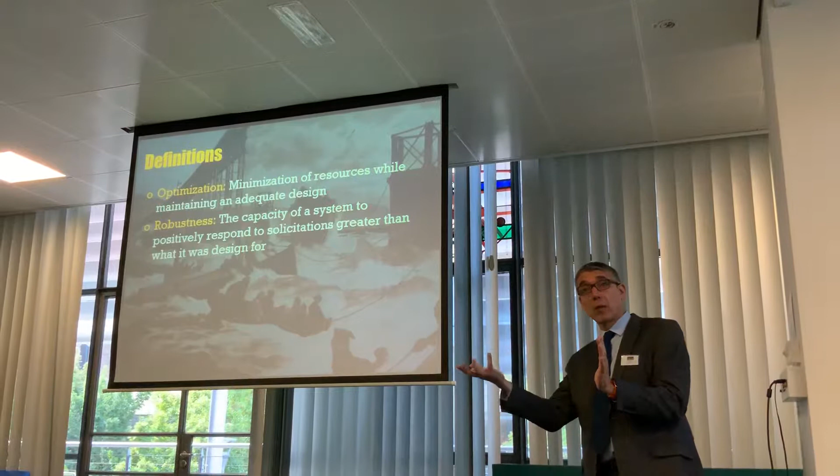Robustness is the capacity of a system to positively respond to solicitations greater than what it was designed for. In other words, I design for a certain set of parameters, but sometimes those parameters get exceeded. The concept of robustness is how well can I cope with solicitations that exceed the design parameters.

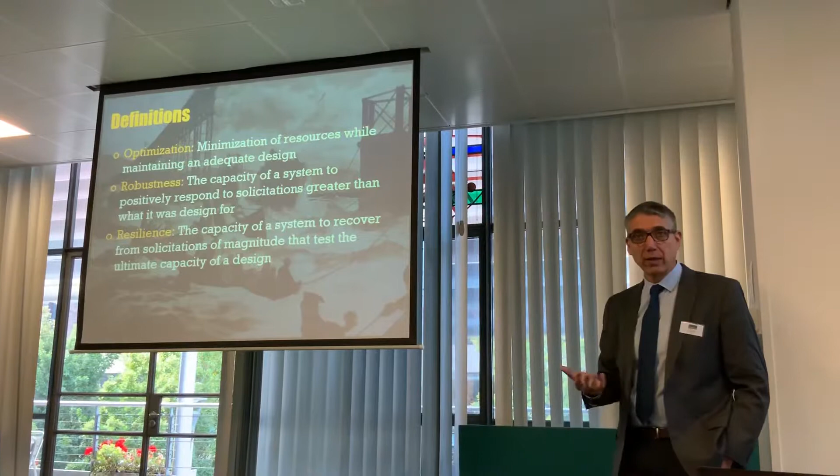When it comes to resilience, it's the capacity of the system to recover. So effectively, we are pushing the bounds to the point where we are inducing certain forms of failure, and we need to be able to understand how rapidly we can recover. A resilient system is a system that recovers very rapidly. A non-resilient system is a system that takes a long time to recover.

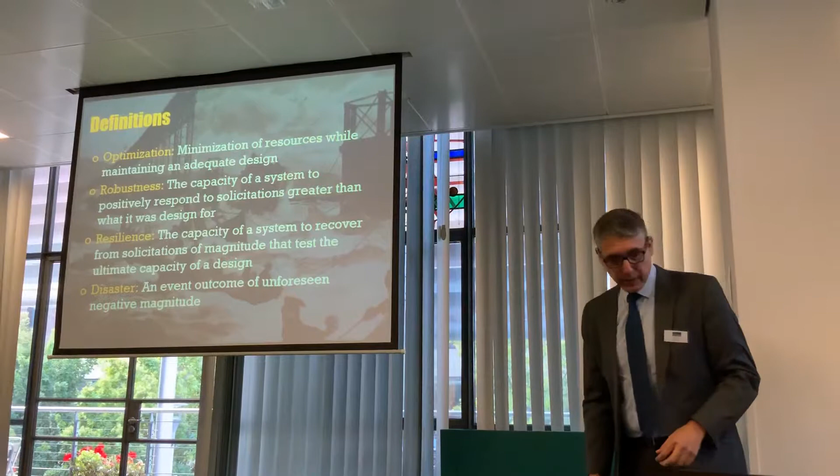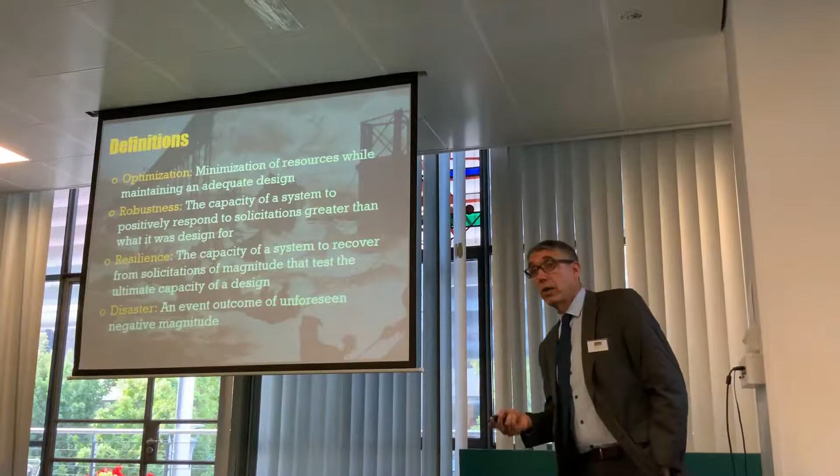So finally, a disaster is an event or an outcome of an unforeseen negative magnitude. I'm going to be using this terminology, but I'm going to define it in those terms. I know there's many other definitions, and people will argue many different approaches to those terms, but I'm going to be using them in those terms. So a disaster is a case that we didn't plan for. In other words, we expected a certain response, and we got something that was much worse than that.

The alternative to all that, when we stop talking about optimization, we stop talking about robustness or resilience, because there's no point.

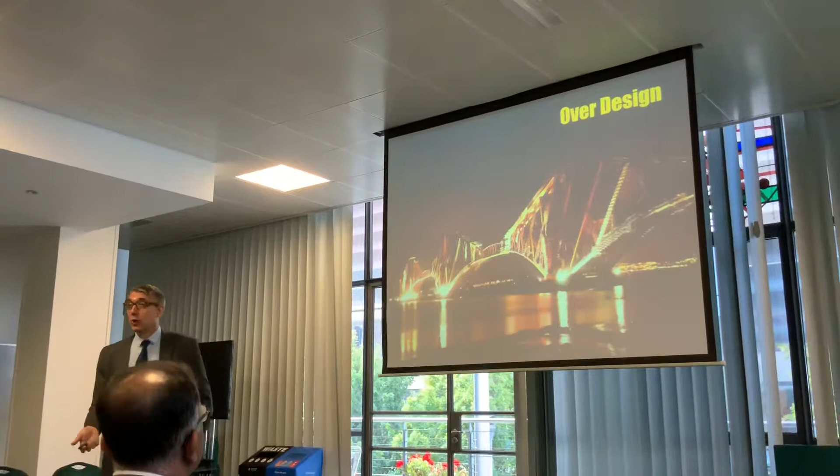It's a case where I completely over-dimension. As I'm sure you're all familiar with that photograph, this was the response to the Tay Bridge disaster - that's the Forth Rail Bridge. You can see that this system was not only very nicely designed, but also there was an element of over-design embedded into the system.

In those cases, basically none of these things mean anything, because effectively I'm just completely over-dimensioning, and I'm over-dimensioning to try to avoid a problem that I can not actually understand. So it is clearly not a matter of optimization, resilience, or robustness, and I'm trying to simply prevent the disaster. So, what is optimized design?

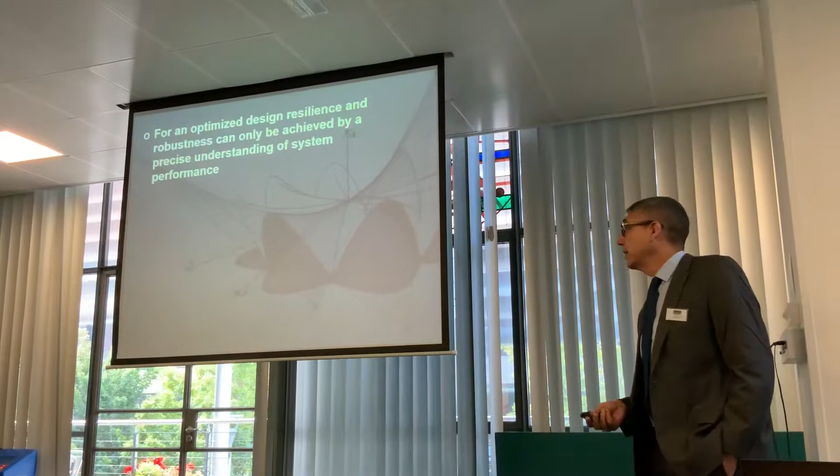When we're talking about optimized design, we need to take into account all 3 aspects of it. Many people have seen diagrams like this, like Candela's diagram of these very thin concrete shells. In that case, basically, it is a truly optimized design for structural purposes.

For an optimized design, resilience and robustness can only be achieved by precise understanding of the system performance. If you don't understand the mathematics of the structural system, in this particular case, you will never be able to actually design a thin shell that works the way Candela designed that thin shell to work. We need to have a true understanding of the performance of the system to be able to achieve the objective.

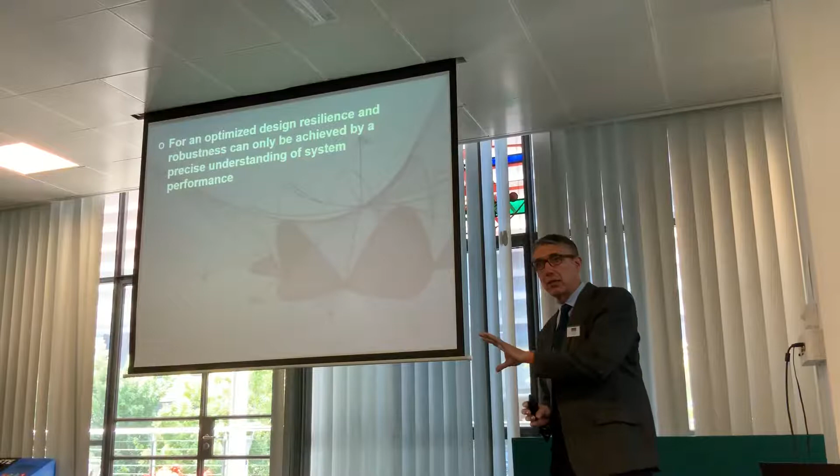At the core to me is that if you can actually explicitly quantify performance, then you can do optimization, you can analyze robustness, and you can analyze resilience. And the question is, can we actually do that for fire?

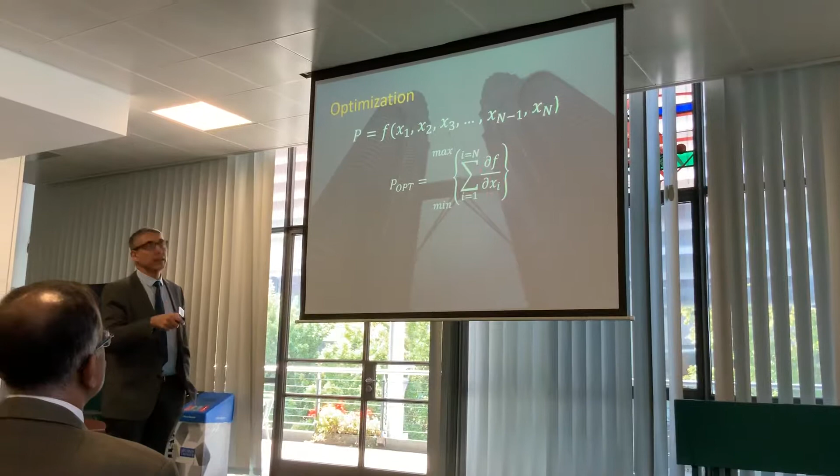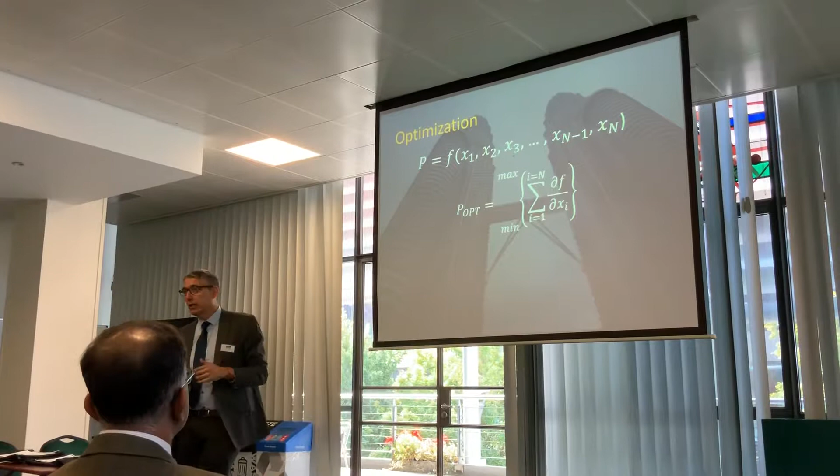When we're looking into optimization, we are not today doing that in the case of fire. What we do in the case of optimization is basically take a function, and that function has a set of variables, n different variables, and it gives me a performance metric. If I'm going to optimize, I'm going to create some sort of summation of the derivatives of all those functions, and I'm going to either maximize or minimize that sum. I put all my variables, I look at all the derivatives, and when the derivative approaches 0, then I'm reaching either a maximum or a minimum.

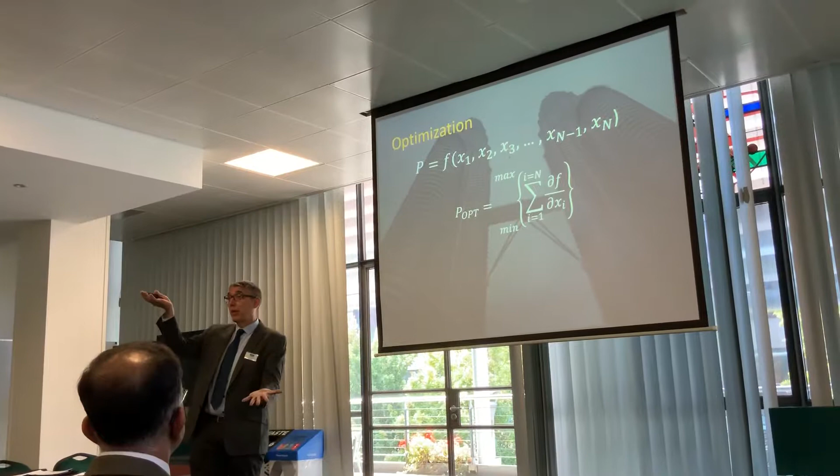I fix all that through some sort of algorithm that allows me to pile up different variables into that function. But the key to this is that the sum I'm working on is from i equals 1 to i equals n. In other words, to be able to optimize the system, I need to be able to optimize simultaneously all the variables, because all the variables represent trade-offs. So effectively, if I'm bringing one up, the other one has to come down in such a way that at the end I arrive at the optimal function that I need to work with.

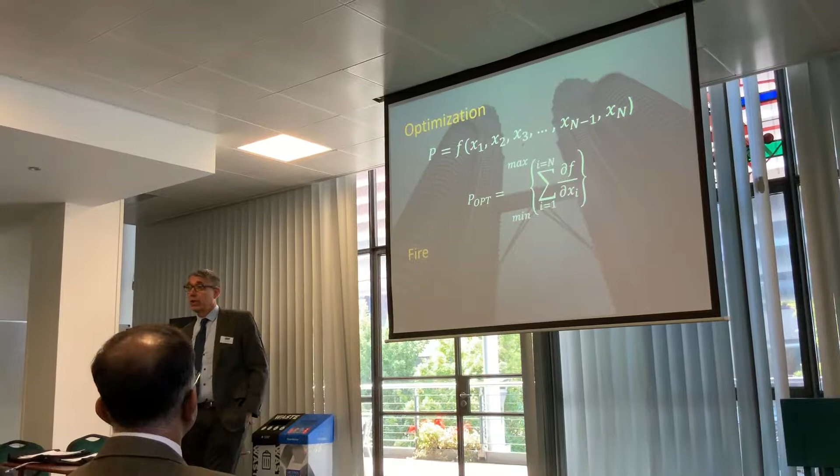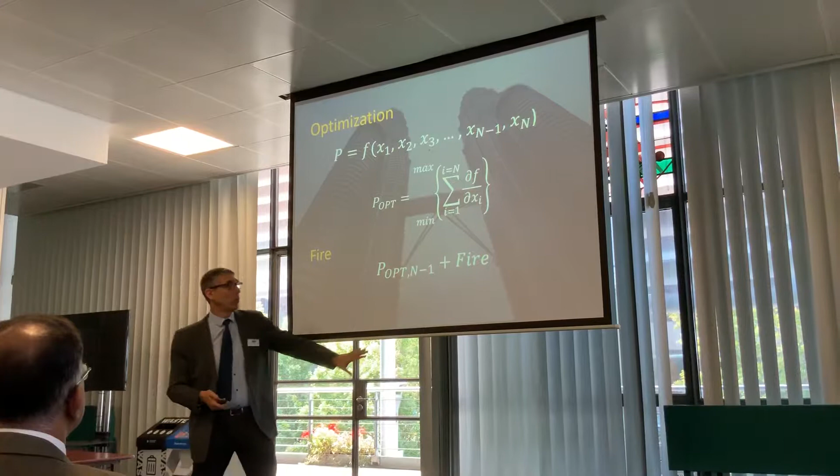The problem is that in regards to fire, what we're doing is effectively optimizing for n minus 1. Once we optimize for n minus 1, and then we slap on the fire, the outcome is never the optimal. In other words, this is a mistake. We cannot optimize in those terms, because effectively you are optimizing all the variables, and then adding on the fire as the final variable of the problem. And that is very problematic.

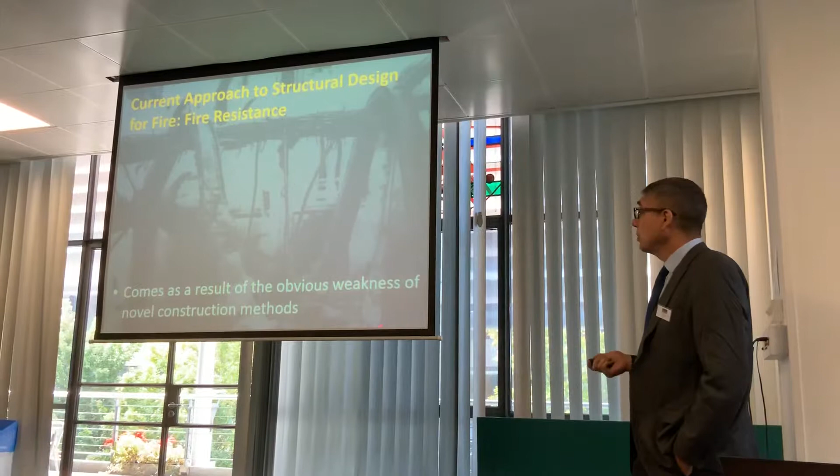Now you can see that in the current approach - because obviously the current approach is that of fire resistance - it was a very old process that came as a result of the obvious weaknesses of novel construction methods. As you can see here, the steel beams hanging on top of the timber beam. So we had a very simple problem that we needed to solve, and we tried to fix it by creating the concept of fire resistance.

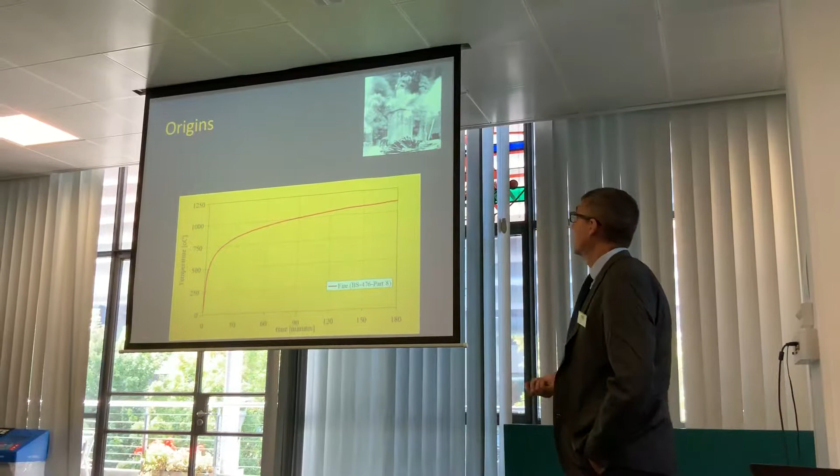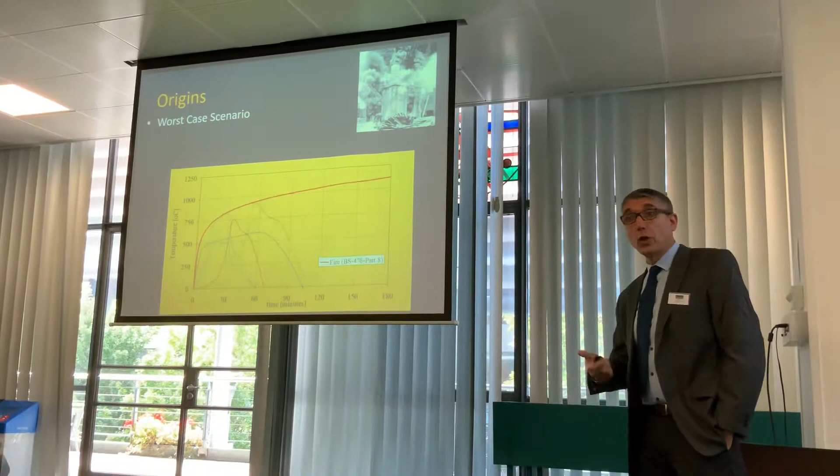That concept of fire resistance led to this particular curve, and that curve was devised with tests that looked like this - this is the 1920s, and this is what we were doing. We were trying to achieve a worst case scenario, not an optimal condition or understanding of the problem, just a worst case scenario. Basically we created an envelope to that worst case scenario, and then we created a failure criteria related to total fuel consumption that gave me the required fire ratings.

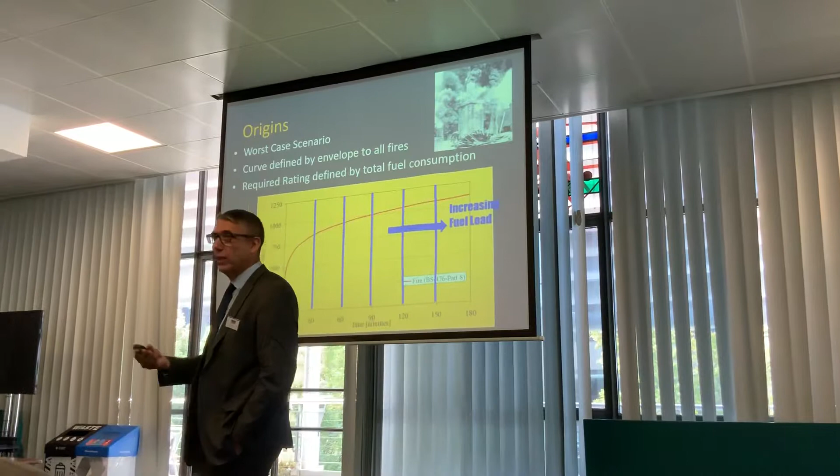That doesn't mean that I understood the problem. That doesn't mean I understood structural behavior. All that means is I created an artificial scenario that made me comfortable that I was on the conservative side.

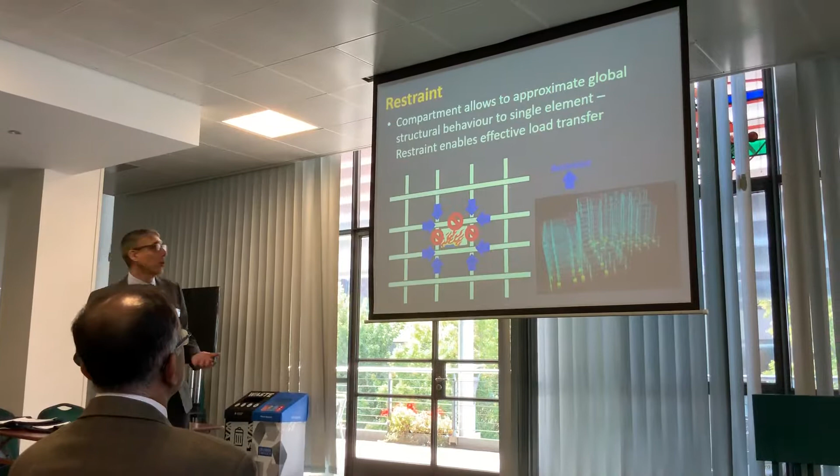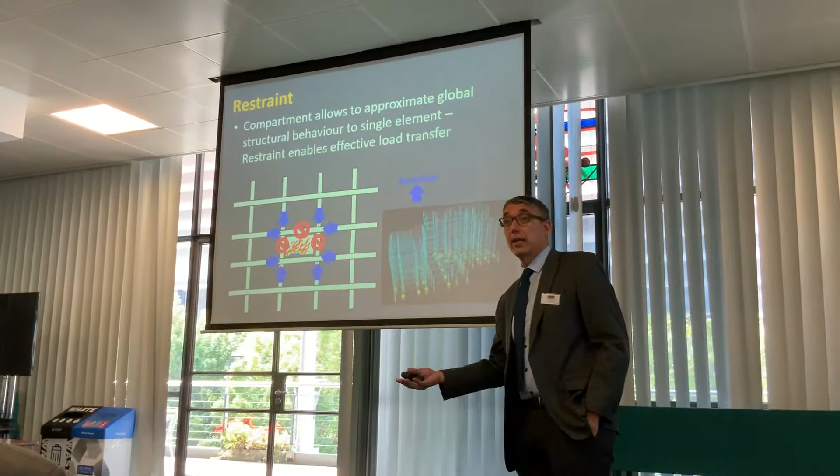There were a lot of arguments made about restraint in such a way that you could test a single element and then project that to global behavior. God knows if that could have ever worked. The problem is we've carried those arguments, enabling us to work with single element testing and extrapolating that to full structural behavior.

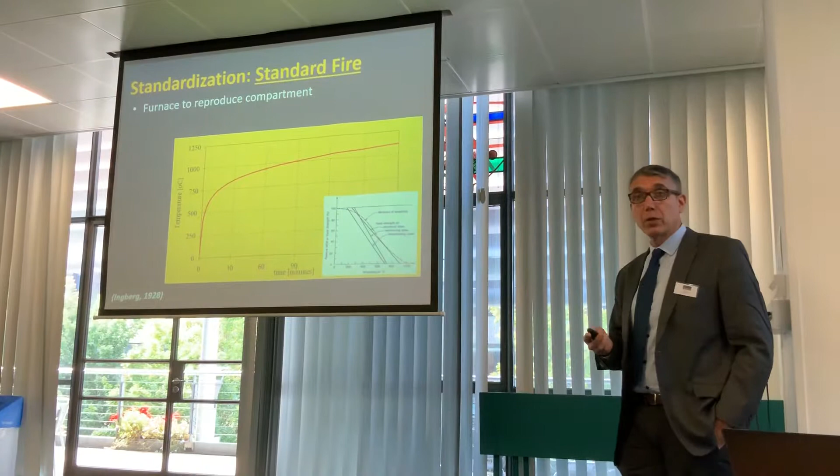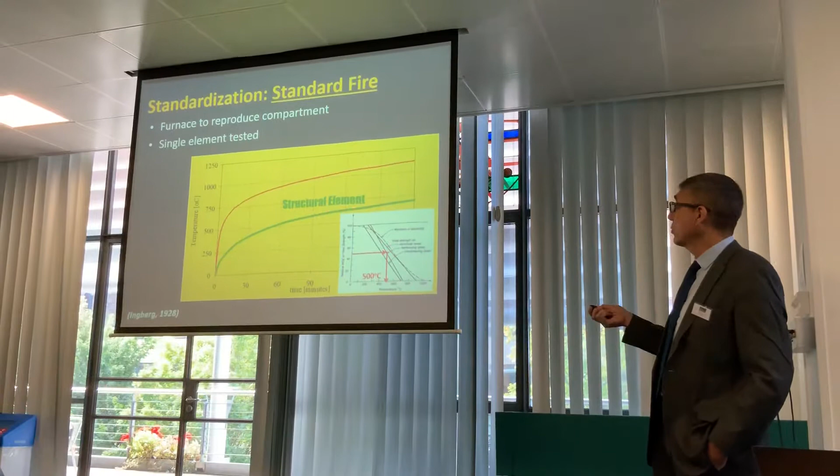So we did all that, then we created the standard fire, we created a test, the furnace reproduced that particular worst case scenario, and we rely on a very simplistic failure criteria, for example in the case of steel, arriving to a certain percentage of its mechanical properties. So we determine after we lose a certain percentage, then all of a sudden we can say, if I'm heating the structural element and I can find that critical temperature, I can get my fire resistance. So what's physical about this?

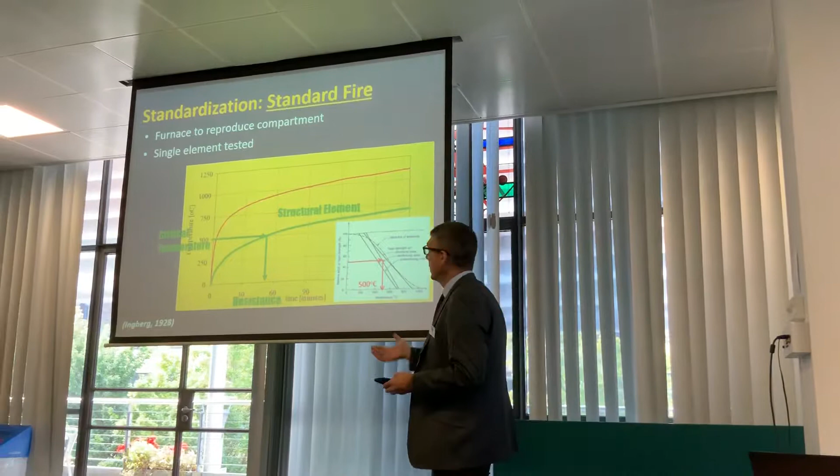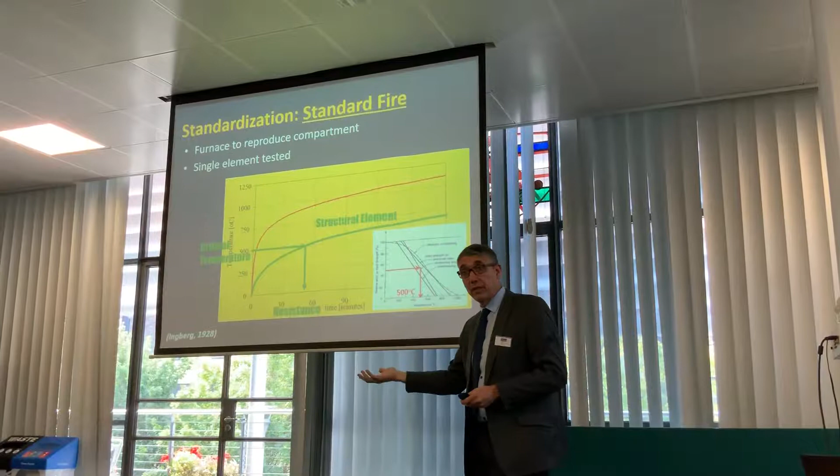Physical about this is not the fire. The fire is a mathematical envelope to an event that is actually a compilation of events, so it's just an envelope. The requirement of fire resistance is based on total fuel consumption. Now total fuel consumption in many ways depends on so many variables that whatever way it was defined, it was probably not necessarily a physically based definition, it was just purely an arbitrary test. The failure criteria utilizes one physical parameter, but it ignores many other parameters like thermal expansion, for example.

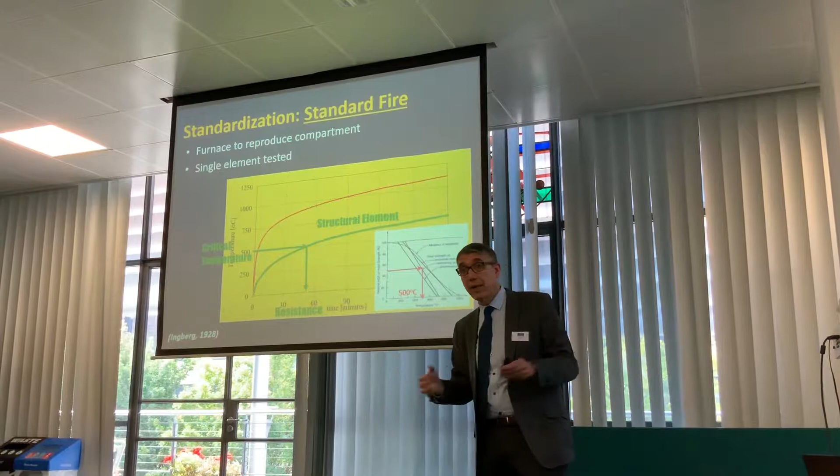And then all of a sudden we've eliminated all the physics of the structural behavior. So effectively this is not a physical problem. It is just purely a concoction that we have created to try to describe in a conservative way a form of behavior that we want to avoid. That's really all it is.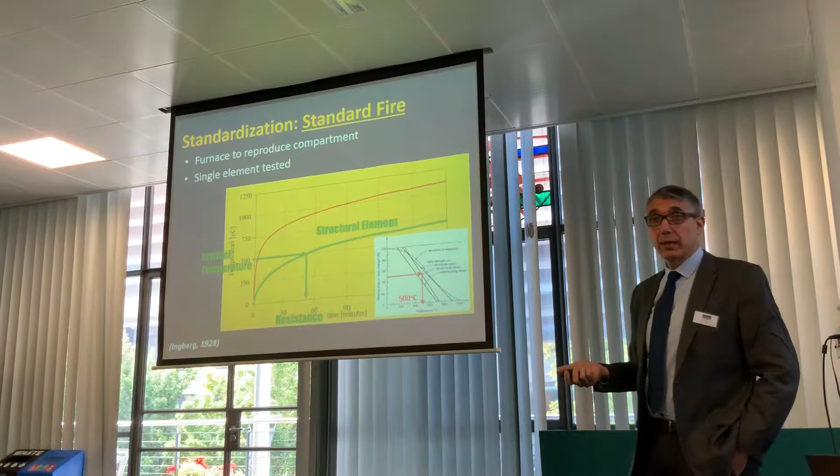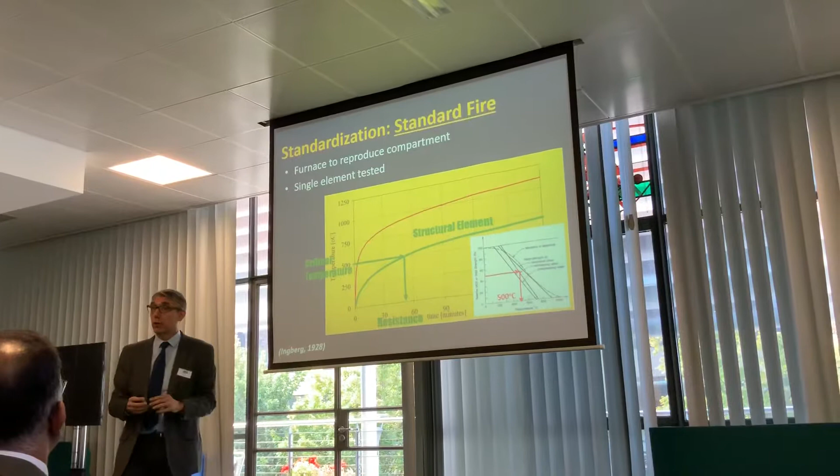Now, can this allow me to do optimization? Not at all, because the problem is that effectively I don't know what problem I'm modeling here. All I am doing is creating a concoction that then I can put into regulation that effectively eliminates 99% of the physics of the problem. So all these concepts of optimization, resilience, and robustness clearly cannot be used in the context of fire resistance.

It is not possible. It's the optimization of n-1 variables plus fire, and it is adding fire in a completely non-physical way. So the first step is to accept that the way in which we do it has nothing to do with this terminology. This has absolutely nothing to do with optimizing with resilience or with robustness. It is purely a regulatory concoction that effectively allows us to design under an umbrella of comfort that we are within the conservative bounds.

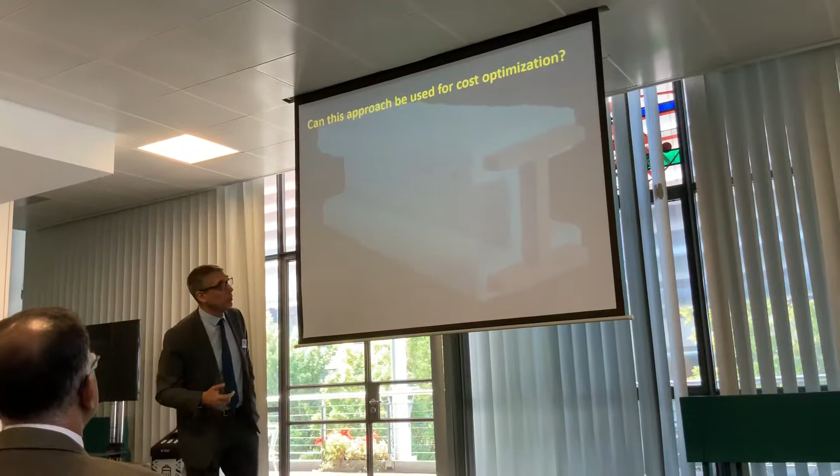So, very, very simple. This is something that a former student of mine, Allan Jowsey, presents quite regularly, which is the most simplistic form of optimization: money.

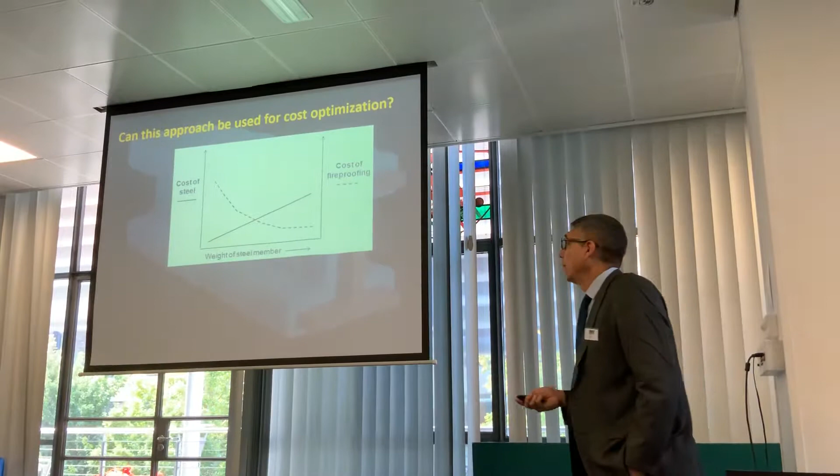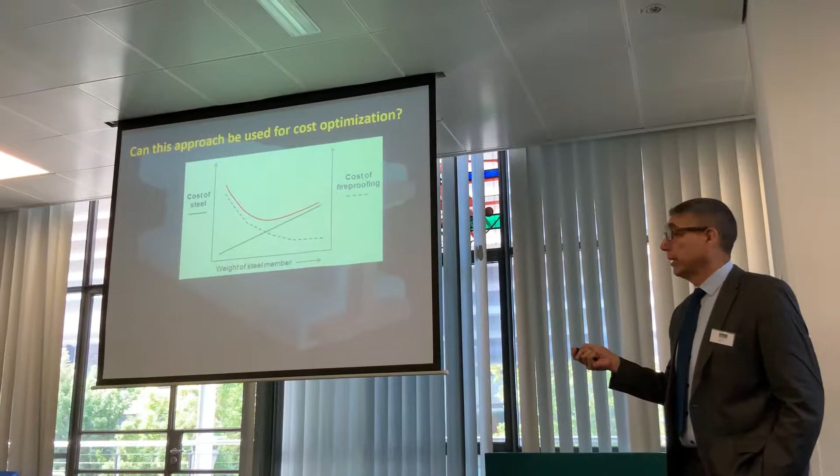So if you take the cost of steel, it increases linearly with weight. If you take the cost of fireproofing, it decreases as the steel member becomes bigger. So effectively the cost of steel plus fireproofing is the summation of those two curves, and you get that curve. Optimization means that you are here — that is the minimum cost that you have for the system.

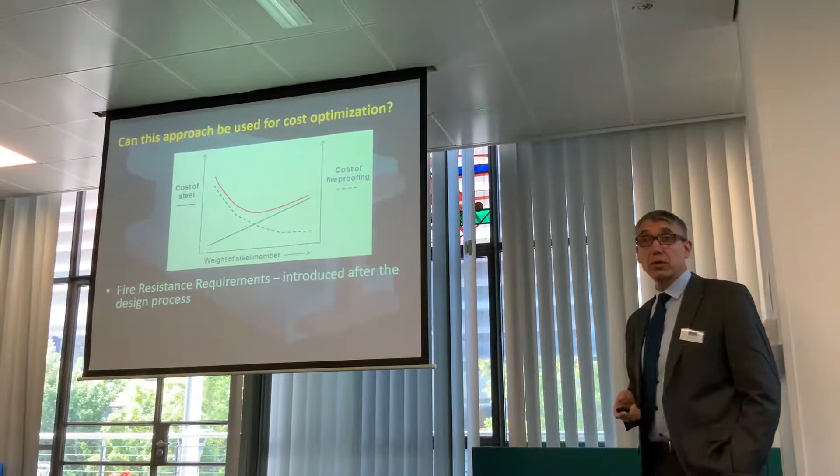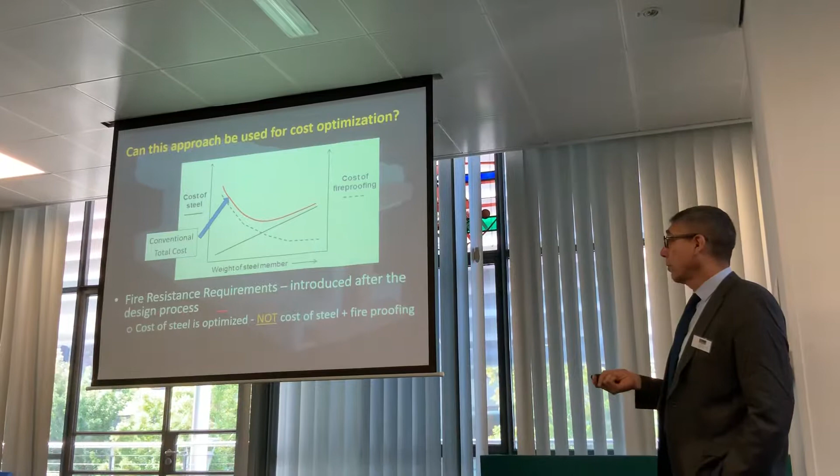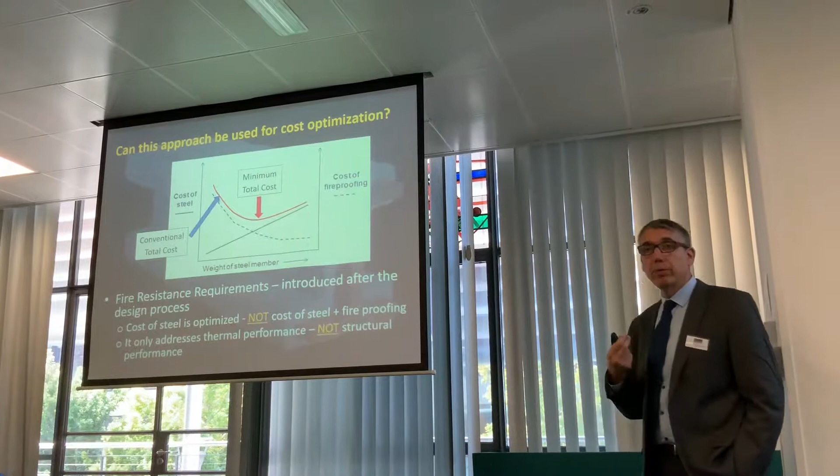So when you have fire resistance requirements, you're going to introduce them after the design process. The structural engineer is going to try to optimize for the minimum amount of steel, so they're going to go as far as possible in here, and then they're going to slap the fireproofing on and end up here. In reality, if the two things were done together, you would not be in a situation where the system is unoptimized, but you would actually be attaining the minimum cost. It's as simple as that. Even in the most simplistic of analysis, you realize the process we're following is not leading to optimization.

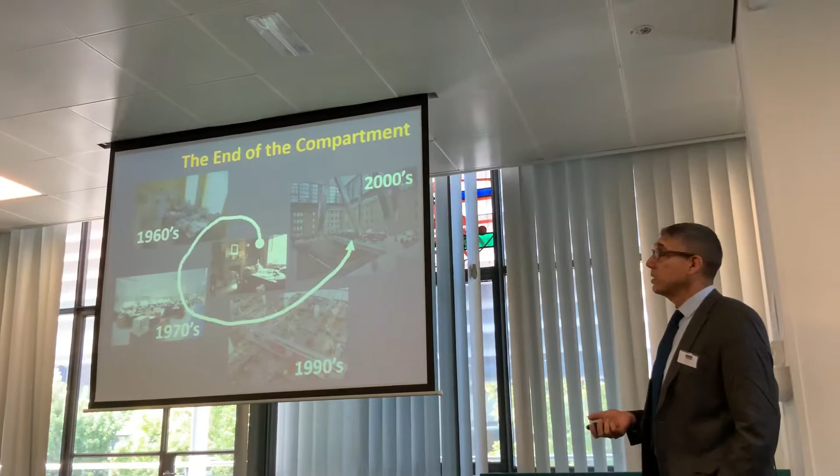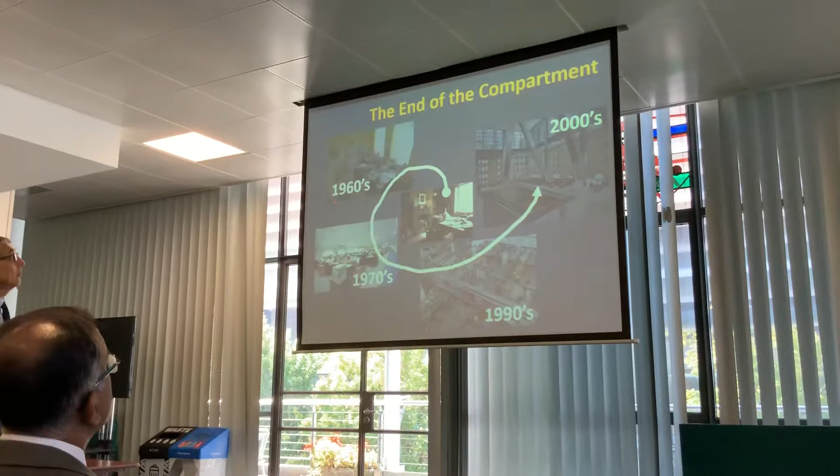So in a similar manner, we have the fire resistance framework that depends on the existence of a compartment. The whole worst case scenario was defined about that. Now, if you look at this, maybe this was valid all the way till some time in the 1960s, but clearly beyond that, the whole concept of the compartment is gone. So the physics now doesn't even resemble reality. So can I actually talk about robustness, resilience, or optimization, where now I have a problem that has nothing to do with the problem I originally set myself up to solve?

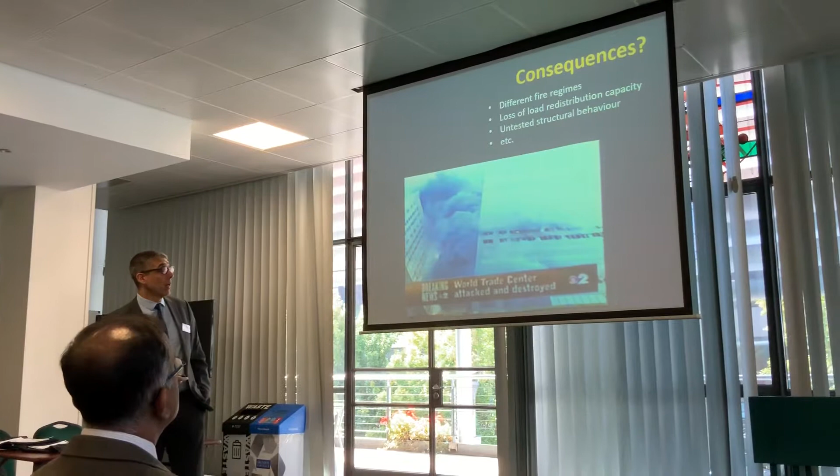The consequences: you have different fire regimes, you have loss of load redistribution capacity when you have, for example, a traveling fire that is moving around. You have untested structural behavior, all sorts of different things that appear at that point. Now, World Trade Center 7 is a perfect example of that, and it shows that you can have a fire that has absolutely nothing to do with the existing framework.

So how do we do true optimization? Basically, we need to establish structural performance. We know how to do that. You've all been working for ages in this matter, and there's a lot of work that has been done, and structures have been understood to a great extent. Nevertheless, we seem to believe that somehow the problem has only one side.

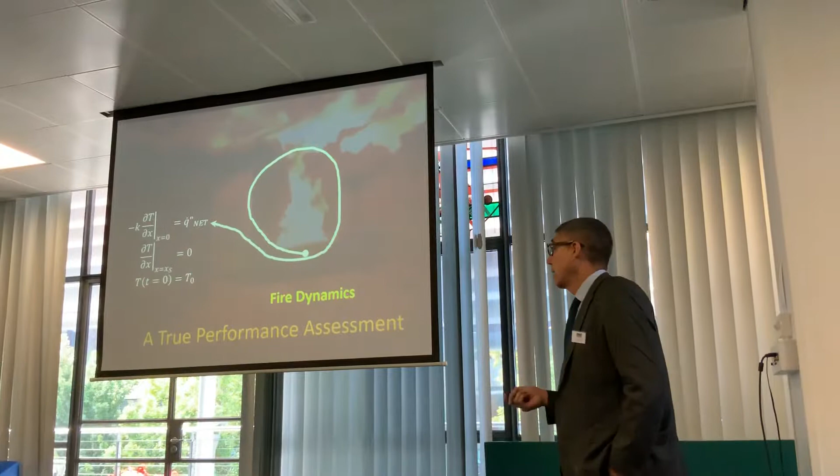So if I look at true performance assessment, the first thing that I need to do is to be able to understand the fire dynamics. That fire dynamics is going to give me a heat flux to the structure. That heat flux is going to be embedded into a heat transfer model, and that is going to lead to a structural analysis. Right now, all this is a fire resistance test, okay? But it's not the reality of a compartment.

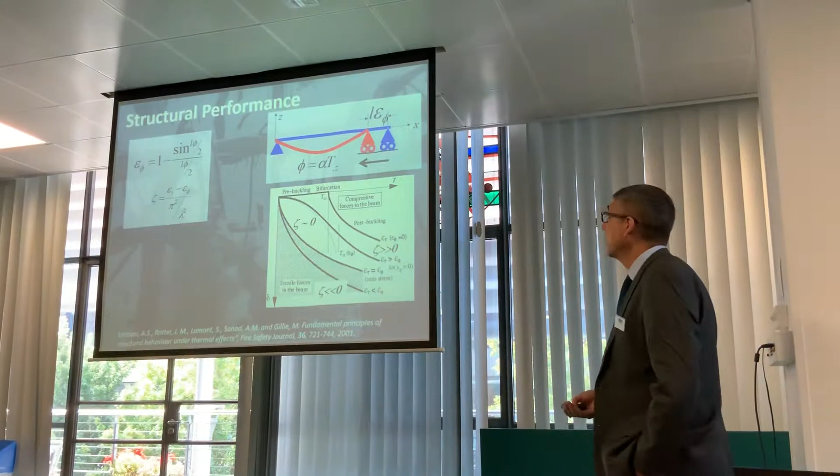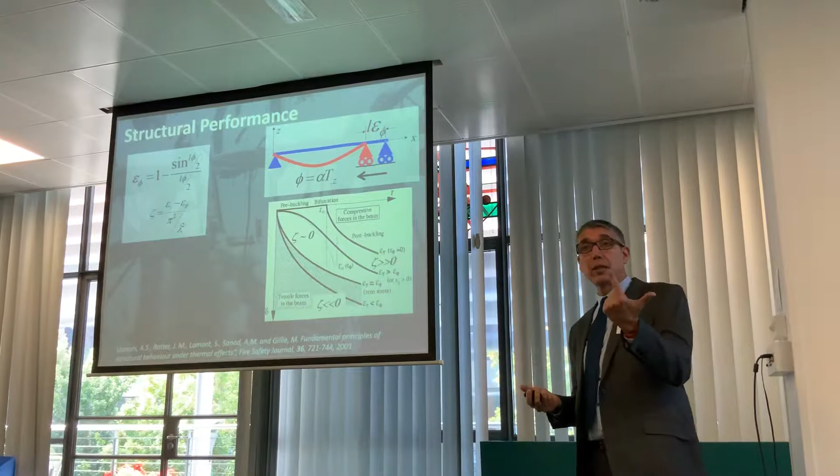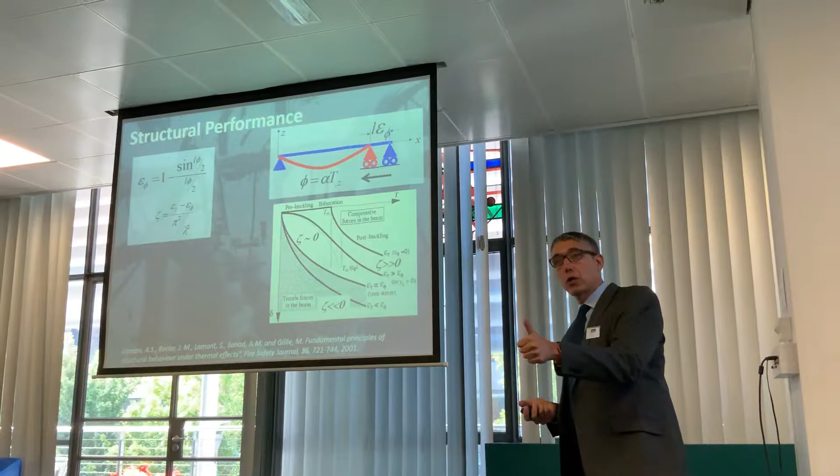So, nevertheless, when Asif developed this many years ago, he put a very simple expression that effectively defined the displacements as a function of fundamentally two parameters, the temperature and the temperature gradient. So without the temperature gradient, you don't get the value of phi, and you cannot get the behavior of the structure. So it's not only about the energy that you're putting in the structure, but it's about the rate at which you put it in. So if you don't have the temperature gradient, then you don't have structural behavior.

Now, it's very, very simple. So it's essential to be able to have the temperature gradients. Now, the temperature gradients depend on the net heat flux, and therefore depend on the fire. Does the furnace deliver the temperature gradients that I need?

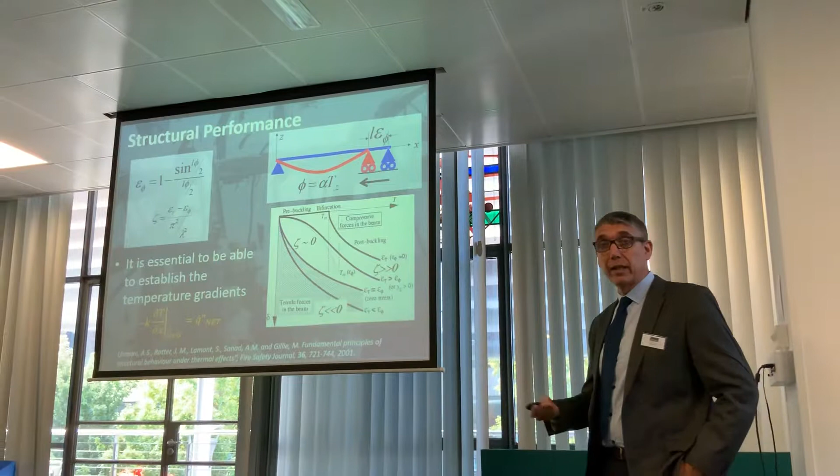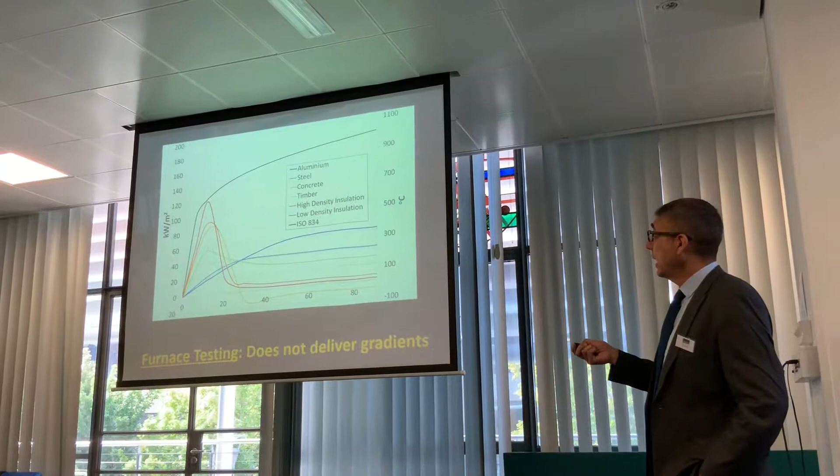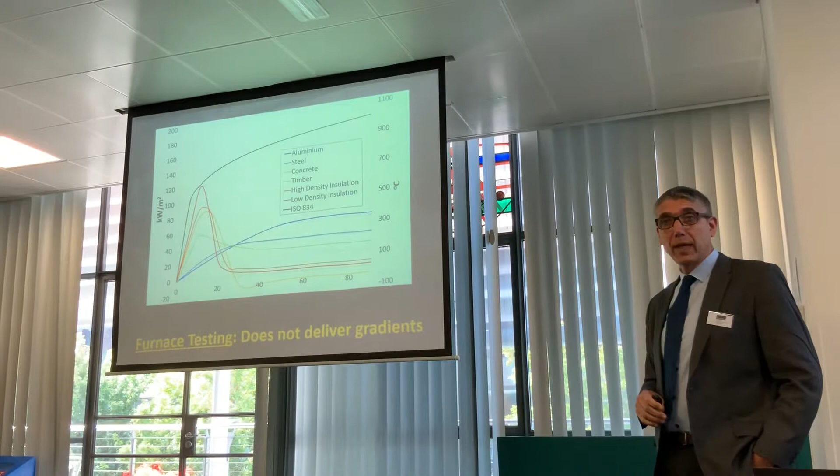Well, clearly not, because if you look at furnace testing, and I change different materials, here is the temperature versus time curve of the furnace, and every material corresponds to that particular evolution of temperature as a function of time. And as you can see, depending on what I'm testing, I get a different temperature gradient. And if I'm testing timber, I get negative temperature gradients because the timber is delivering heat to the furnace and not the furnace delivering heat to the timber. So effectively, what we're doing has nothing to do with reality.

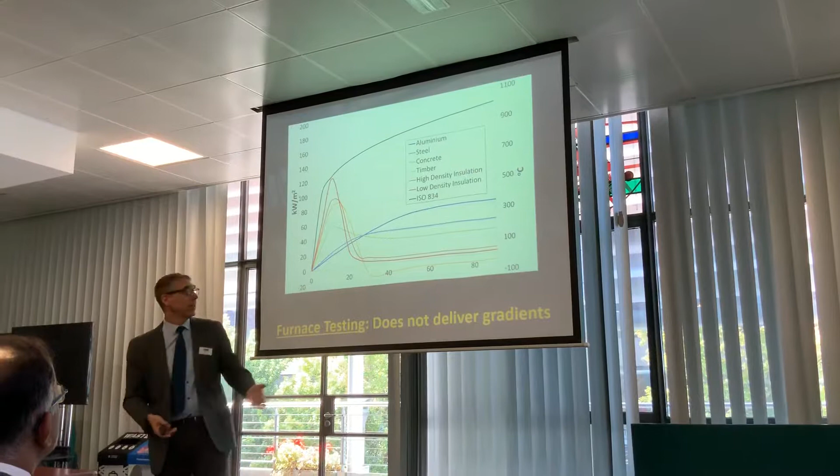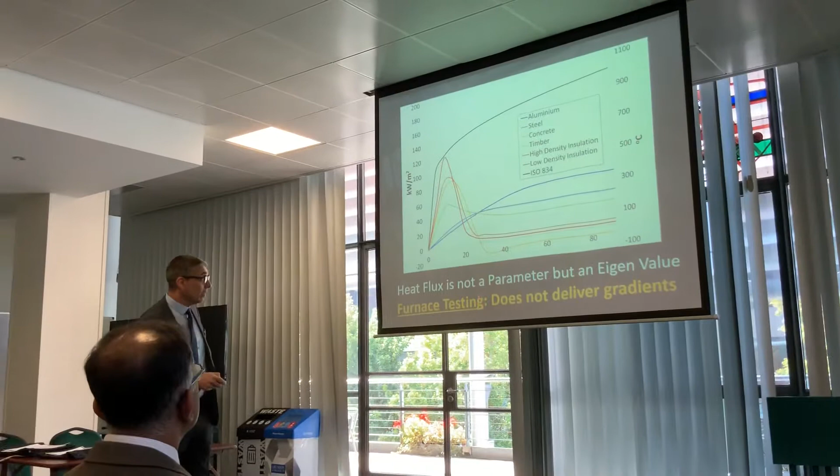And while structurally we have identified that the temperature gradient is an absolutely critical parameter, we rely on a testing procedure that delivers different temperature gradients for different materials that you're testing. So in principle, you can see where the problems go. But nevertheless, despite the fact that we know that the heat flux is the eigenvalue that I need to solve, I still stick to a testing protocol that effectively does not deliver the fundamental parameter that defines structural behavior. So, do we have tests that give me those gradients?

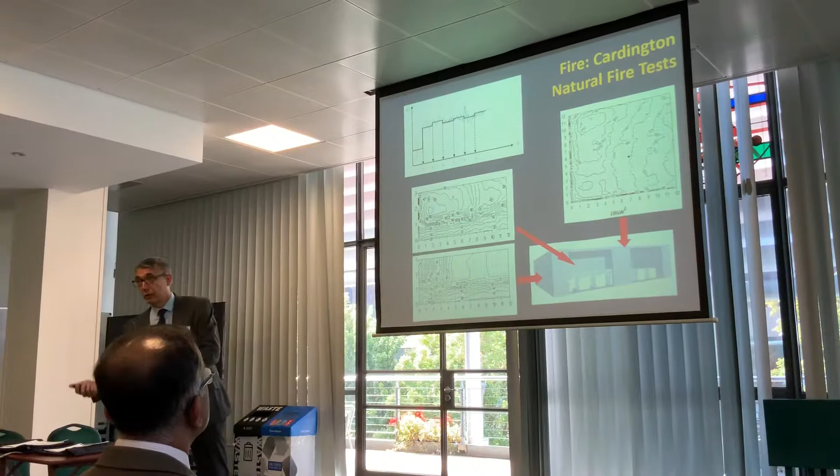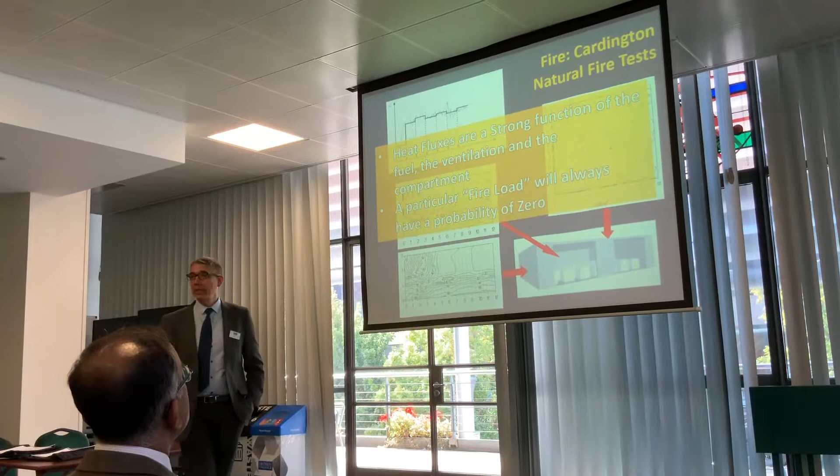We do, but we don't use them. We still go back to the furnace. So we have heat fluxes. We know they're a strong function of the fuel, the ventilation and the compartment. We know many, many things about it, but we don't manage to marry these two professions. Now, we know it matters.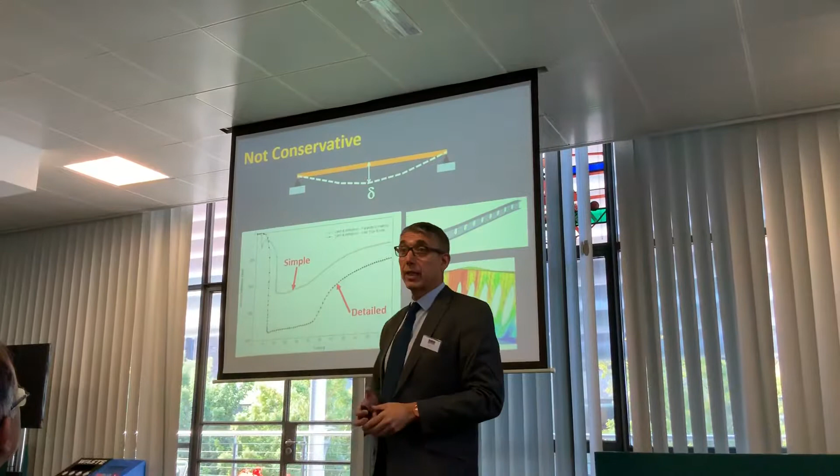So effectively, it does matter, and these are the consequences. Every time we use the wrong science and we shift the problem, we land in something that we didn't expect: the disaster. So this is a perfect example.

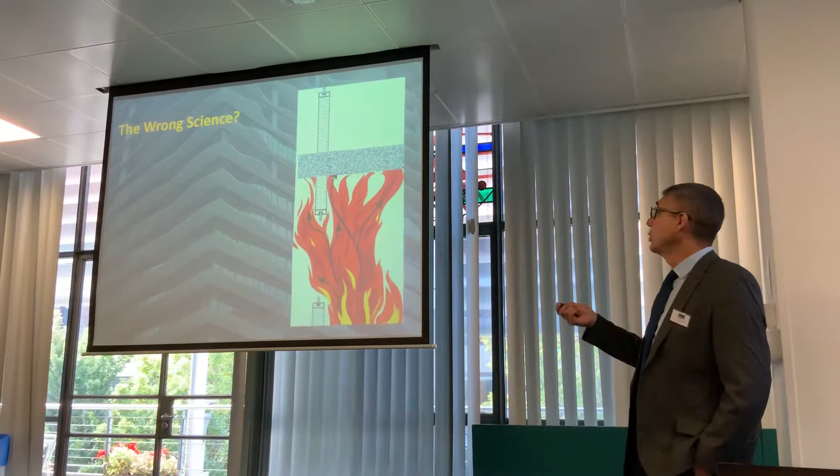When we used to have concrete slabs between floors, we had a very simple approach towards eliminating vertical flame spread. A big concrete slab serves as protection—there is no motion, structural components are minimized. This became a very simple, robust, conservative approach.

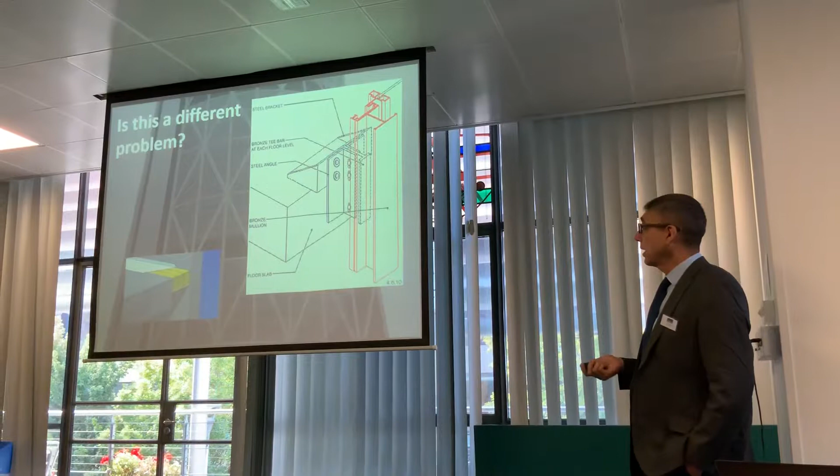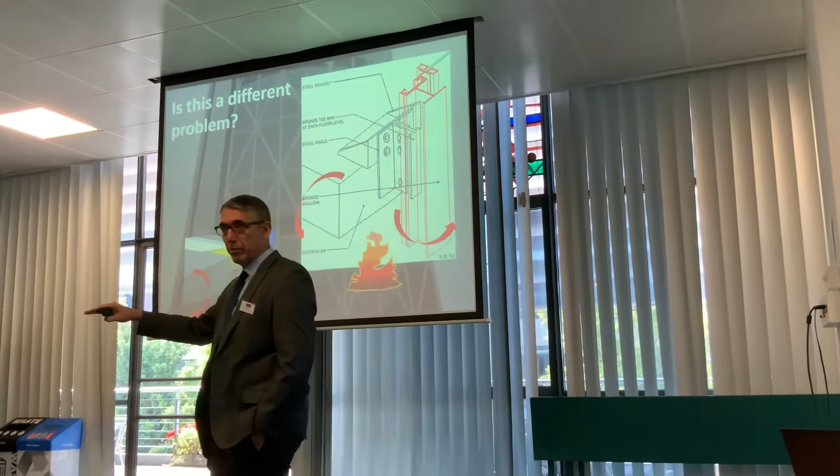The moment that we changed this, we went from this to this, and we put in a very complex connecting system, now trying to stop fire from penetrating this gap, where you have fire and relative motions. We turned a problem that was a simple barrier problem into a problem of relative displacements.

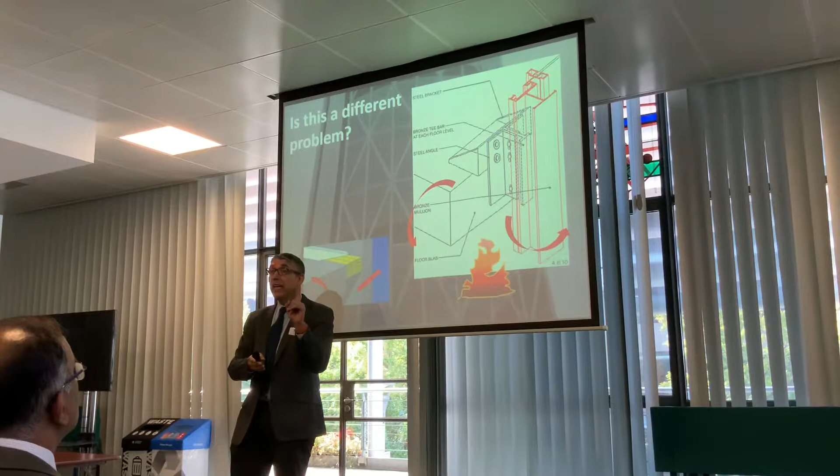Now people are going to tell me, oh, but it's all about the flammable cladding. That's nonsense. We accepted flammable cladding in those materials, but we encapsulated it. The concept we created was the concept of encapsulation.

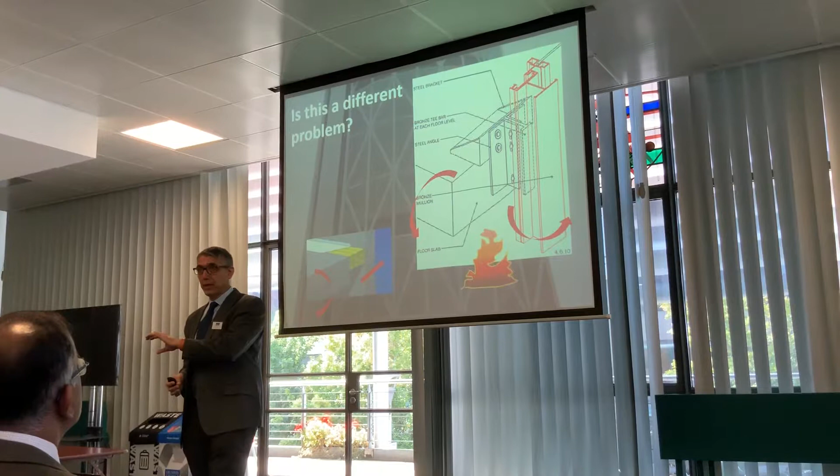And encapsulation of combustible materials fails because of relative displacements. You get pieces moving from one side to the other until the system breaks, you lose your encapsulation, and all of a sudden you've exposed the combustible materials and now you have a problem. So it's not a problem of flammability, it's a problem of structural mechanics. And we have not been able to interpret that in an appropriate way.

So the consequences, we know them, and I don't need to really dwell too much on this. These fires keep happening and will keep happening, and we have absolutely no idea what to do about it.

So in a similar manner, we want very tall timber buildings. And the question is, can we predict performance? Can we use the tools that we have to predict the performance of tall timber buildings? Are we answering the right questions? Are we using the right physics? The bottom line is, are we capable of delivering optimized, robust, and resilient solutions for timber?

In the face of that, again, we have all these examples, and they keep happening, and we don't know what to do about it. Nevertheless, we still believe that we can do it, within the context of the same framework. So when it comes to design, how can we truly optimize the structure if we're targeting the wrong loads?

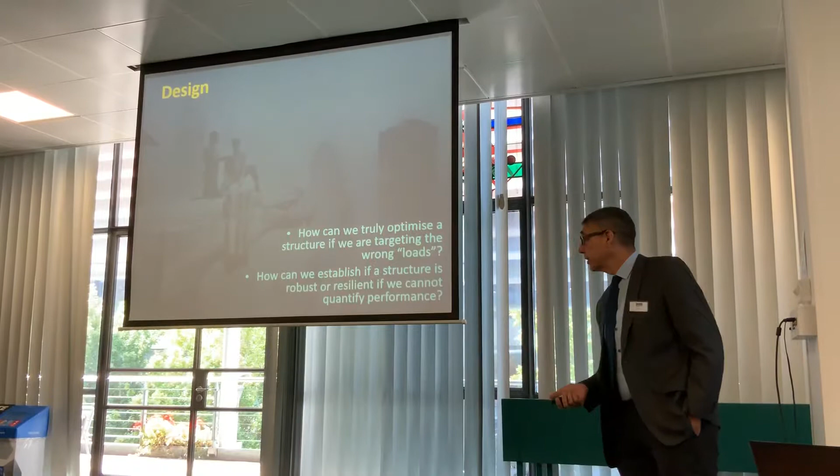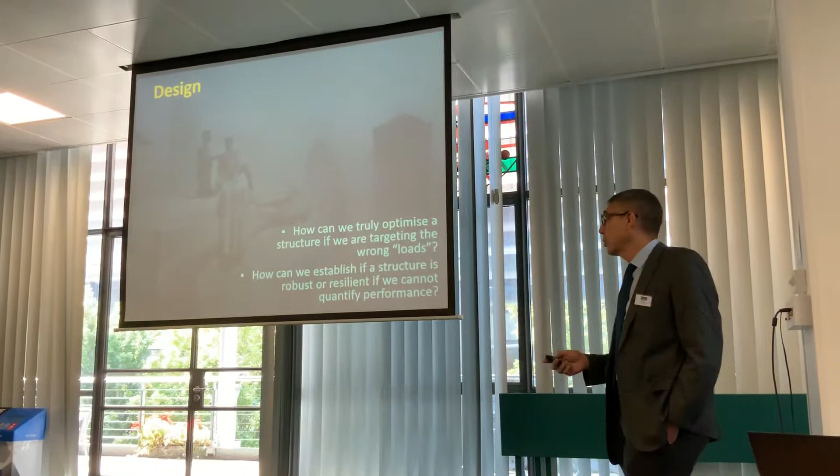This is a real problem that we have. How can we establish if a structure is robust or resilient if we cannot quantify performance? Until we change our mindset and start thinking in a completely different way, and move away from these existing paradigms, we're not going to be able to talk in the same terms as other professionals talk in this field.

So basically, it's a problem of competency. We've rendered ourselves incompetent by complexity, and we are standing within our framework thinking that it still works, when in reality it doesn't. So in summary, optimization, resilience, and robustness, and disaster prevention require true quantification of performance.

True performance requires understanding of structural behavior in fire as much as it requires understanding fires within structures, and it's in the marriage of these two fields that you actually get proper quantification of performance.

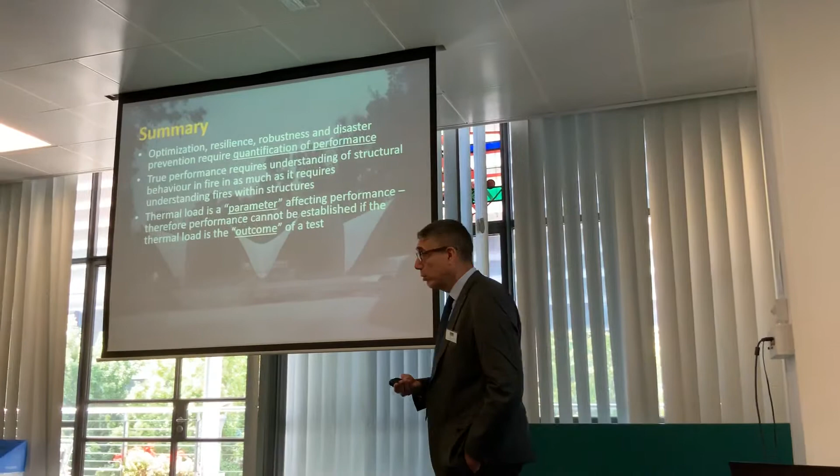Thermal load is a parameter affecting the performance, therefore the performance cannot be established if the thermal load is the outcome of a test. In other words, we need to be able to vary that parameter and work with it, as opposed to getting the parameter out of the test, which is not necessarily relevant or comparable to anything realistic.

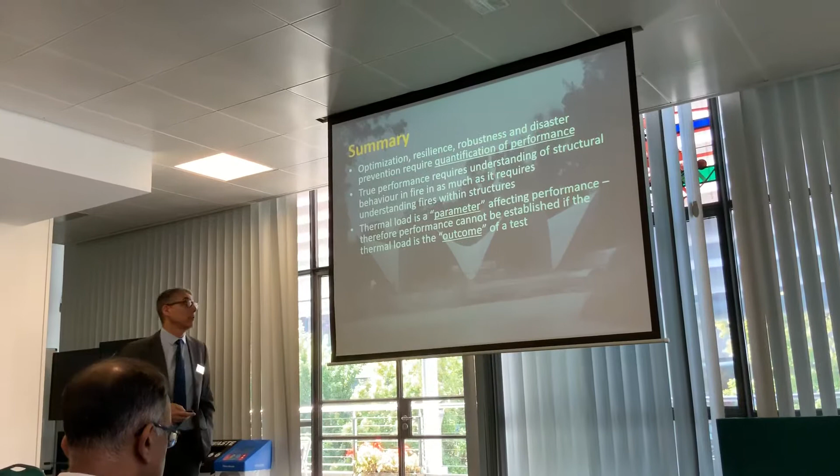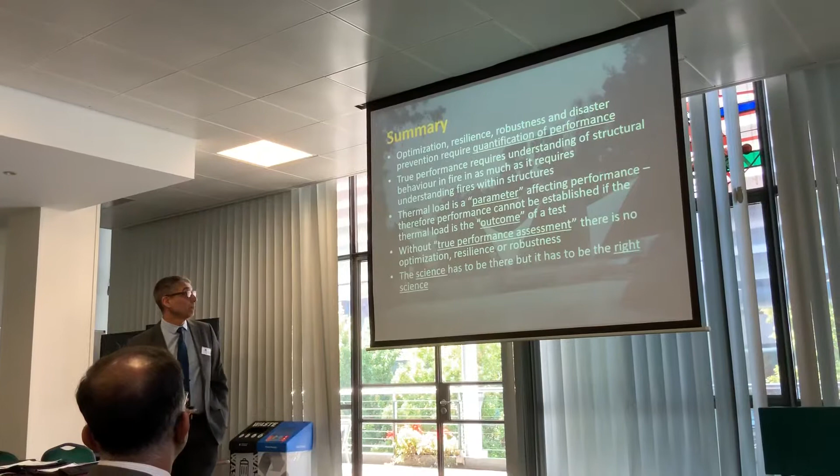So without true performance assessment, there is no optimization, resilience, or robustness, and we have to be accepting of that premise. Unless we quantify performance, we will not be able to use that terminology when it comes to fire. So the science has to be there, but it has to be the right science.

In other words, we have to be addressing the right problem. There is no point in us chasing one problem when in reality we have a different problem. So finally, do we need to rethink competence? And I think we do.

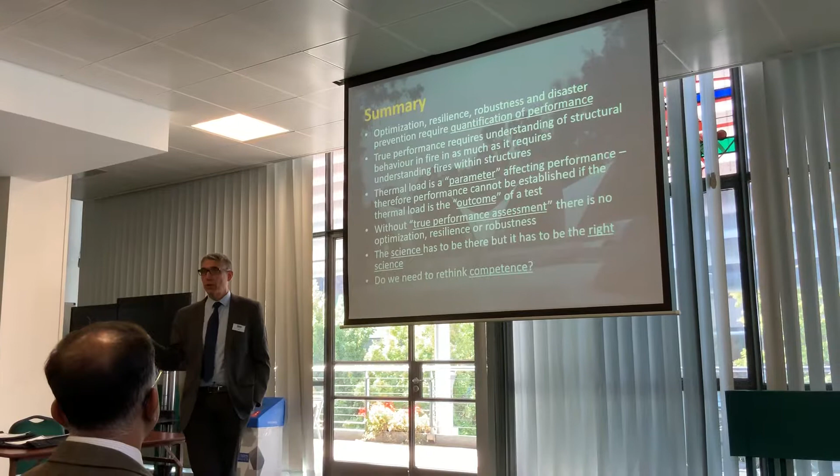And it's not necessarily in the specific physical knowledge or chemical knowledge or materials knowledge that we have. It is more competency in the way in which we think about design. We need to start thinking in a different way to be able to use the tools that we have in an appropriate manner. Thank you very much.